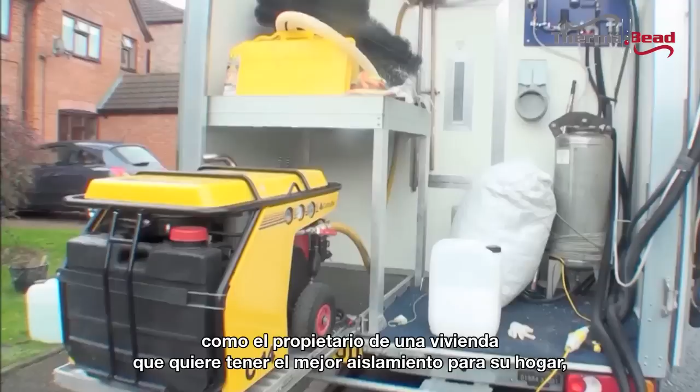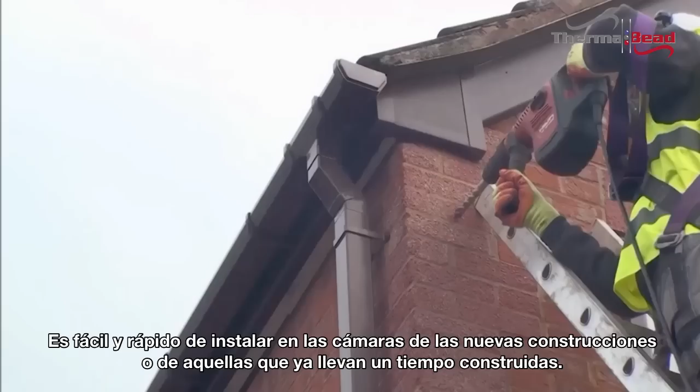Whether you're a building and construction professional or a householder wishing to get the best insulation for your home, there is only one choice for long-term peace of mind. Blown bead insulation using EPS expanded polystyrene is easy and quick to install in cavity walls of new build or existing properties.

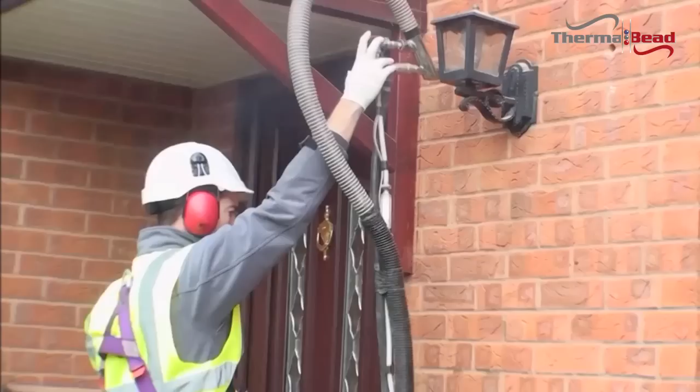It gives superior thermal insulation as well as the reassurance of long-term performance without problems of settlement encountered with other materials. If you choose an NBBA member company, you'll not only benefit from a fast, expert installation, but you will also get the backing of a 25-year CIGA guarantee and BBA-approved certification.

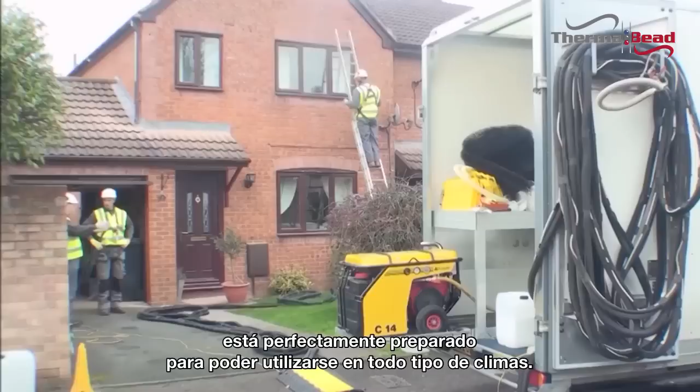There are many advantages from using blown bead, but we'll first look at the ease of installation. The specialist equipment used by NBBA expert installers is completely self-contained and can be used in all weathers for one-day installation. Every part of the property can be accessed and there is no mess left behind.

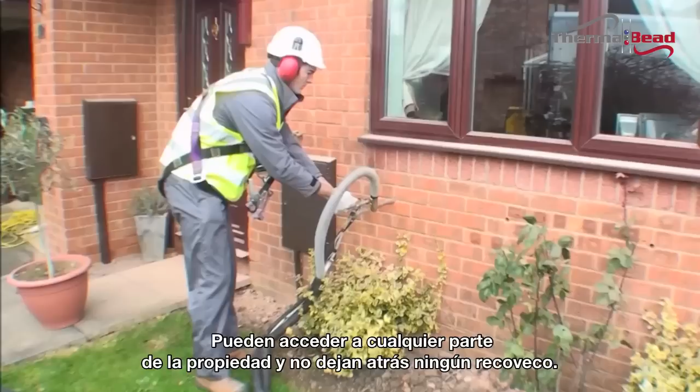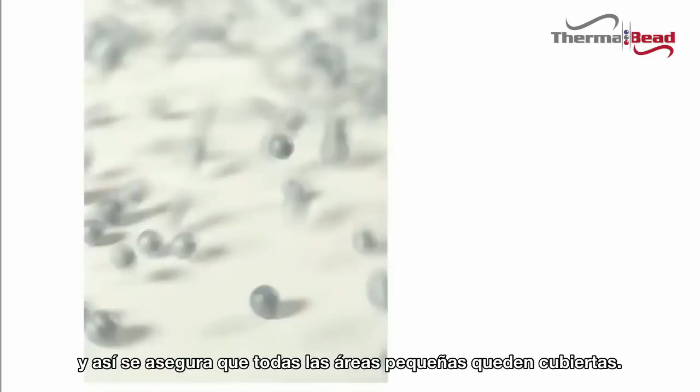Importantly, blown bead insulation actually requires smaller and fewer drill holes in the outside wall of the property. This is because the unique nature of the fast-flowing beads means they fill even the smallest spaces, ensuring all possible areas are filled. After installation, all holes are made good and become virtually invisible to preserve the aesthetics of the property.

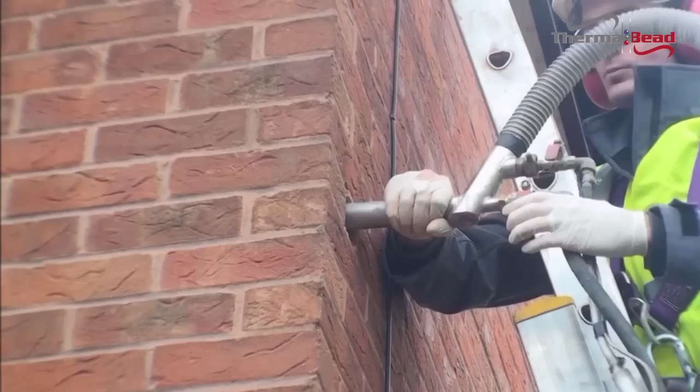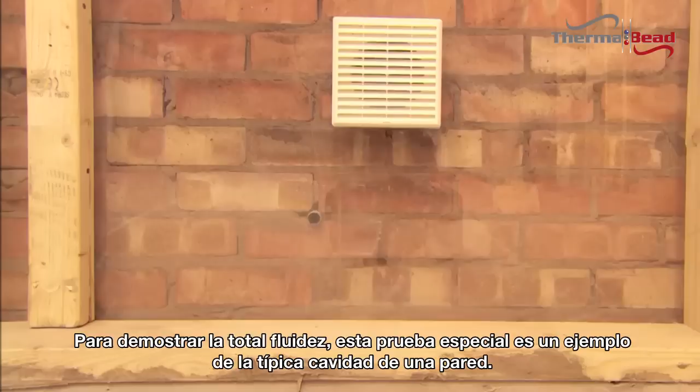With retrofit properties, a long-reach system is available to fill cavities where, for example, conservatories have been built on. To demonstrate flowability, this special test rig is a mock-up of a typical cavity wall. But we've replaced the inner wall of the property with perspex, so you can witness this remarkable flowability as the beads are blown into the cavity.

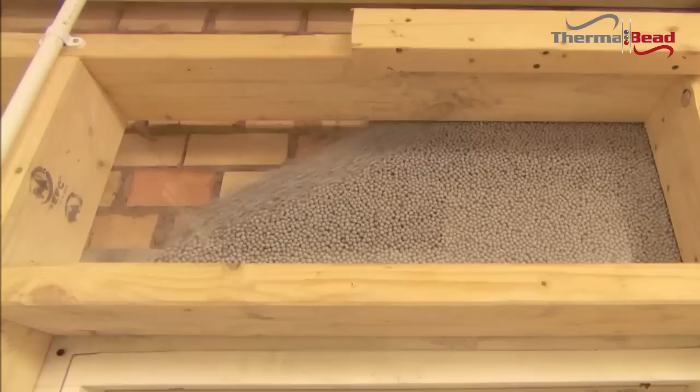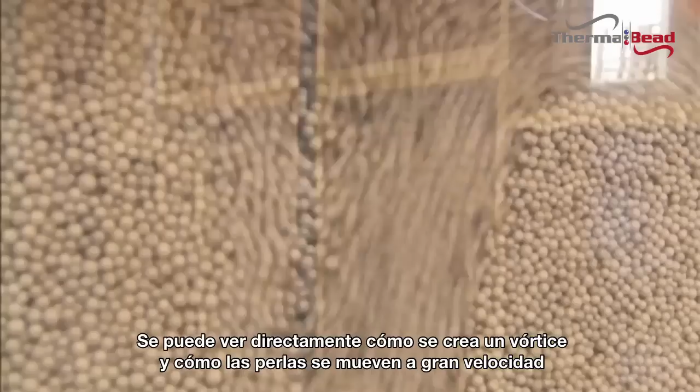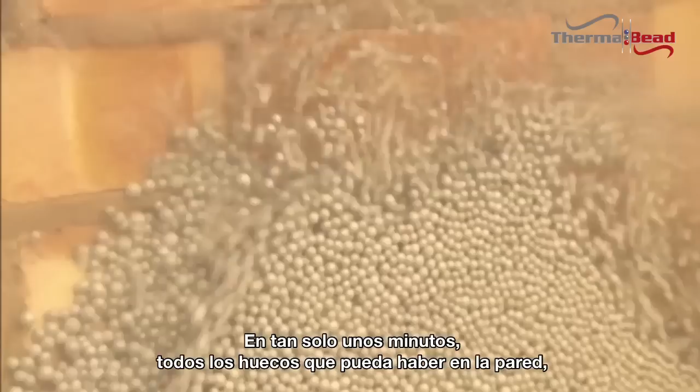Let's look more closely at how blown bead achieves a superior cavity fill. It's because of the special flow properties of EPS beads which no other material can match. You can see straight away that a vortex is created and the beads flow at high speed like liquid into every part of the cavity. They seek out all the gaps and imperfections in the cavity. In minutes, every void around surfaces, joists, conduits, doors, windows and other internal structures is completely filled with thousands of beads to ensure there are no cold spots.

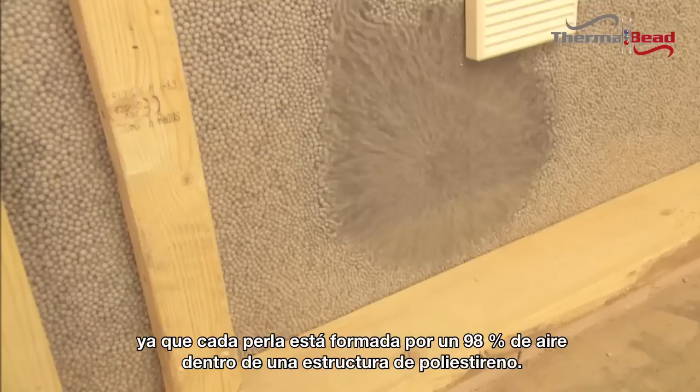Blown beads provide thermal insulation at its most efficient, and because every bead is 98% air captured within the polystyrene, this material gives lambda values which are superior to any other insulation, allowing Part L of building regulations to be easily met or exceeded.

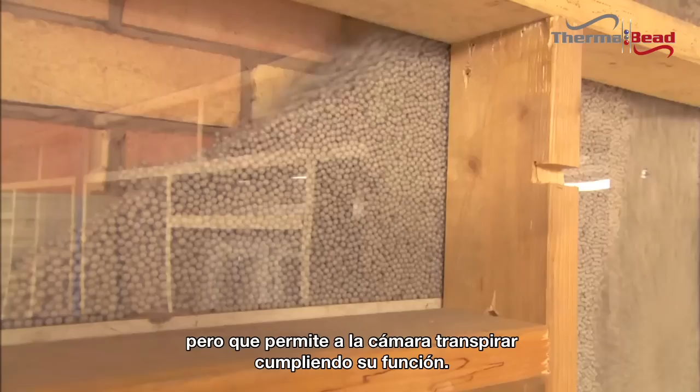After each cavity is filled, the beads settle immediately and become bonded together to form a virtual solid layer of insulation which is stable yet allows the cavity to breathe as intended. Once settled, gravity will no longer affect the integrity of the bead insulation, which means there will be none of the ongoing settlement issues which can occur with other types of cavity insulation.

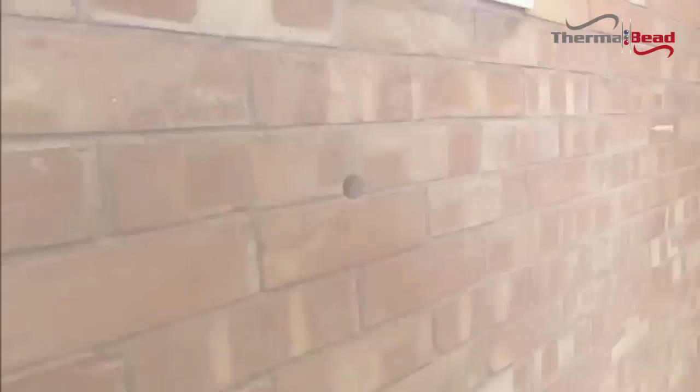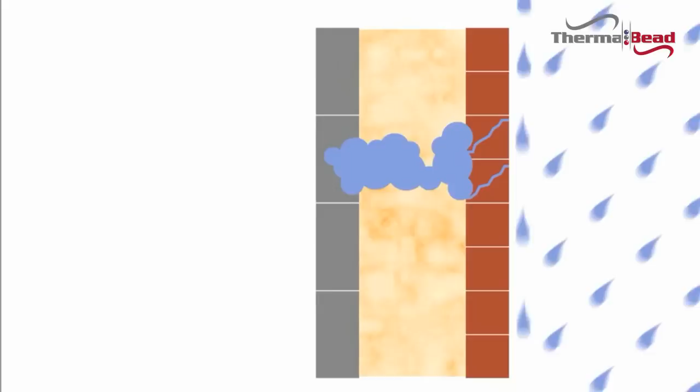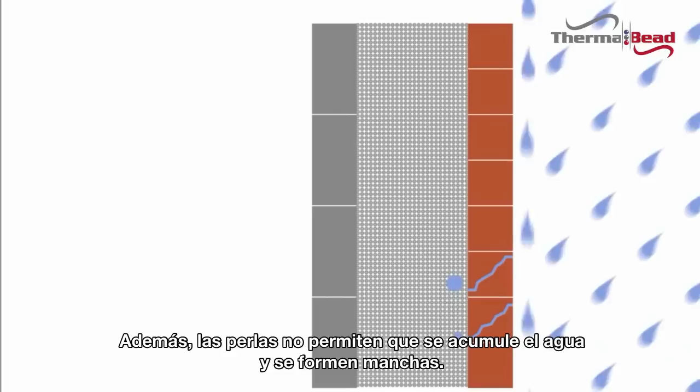Everyone knows the damaging effects which occur when moisture accumulates to form damp patches within walls. EPS beads provide a very effective reassurance against the risks of damp because, unlike fibrous materials which have a natural sponge-like absorption, EPS does not absorb moisture. Additionally, blown beads in a cavity will not allow water to accumulate in patches.

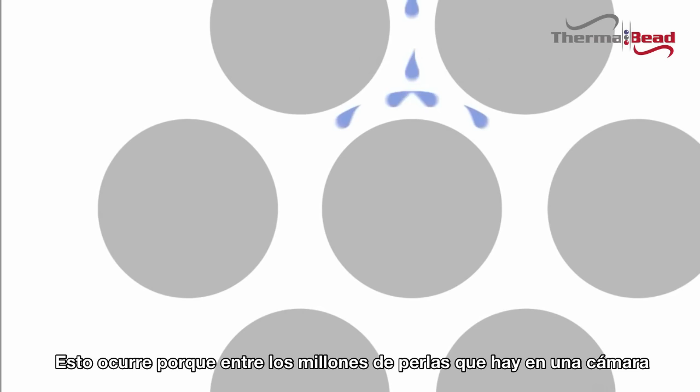In fact, the millions of tiny spheres allow the safe and effective dispersal of any moisture. This occurs because, between each of the millions of beads in a cavity, their spherical shape forms curved channels, and this network of connecting channels allows water to drain freely and rapidly to the ground.

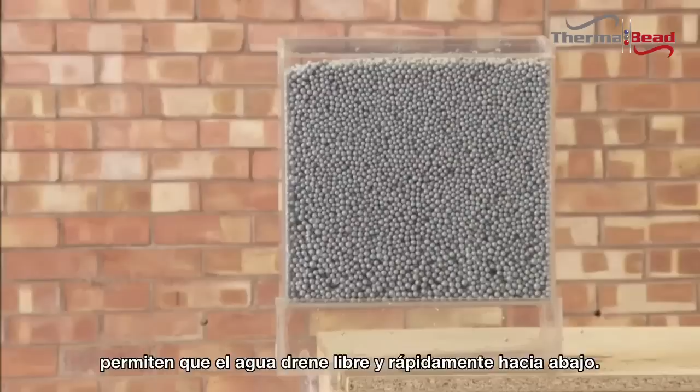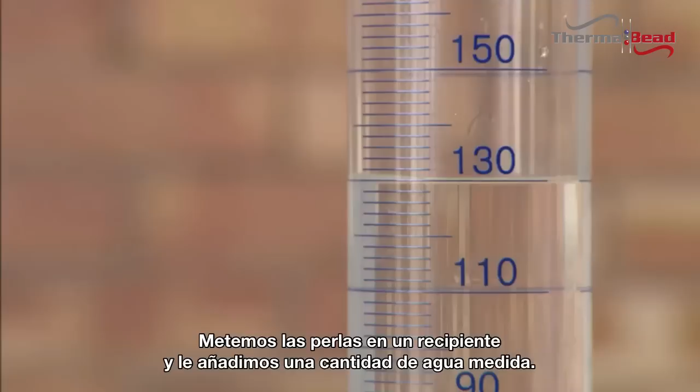To show how it works, this test apparatus demonstrates the highly efficient moisture dissipation qualities of EPS bead insulation. With the beads in place in a mock-up cavity, a measured quantity of water is added, and two things happen. First, gravity immediately pulls the water downwards, and the smooth curved surfaces of the beads allow fast flow to ground level.

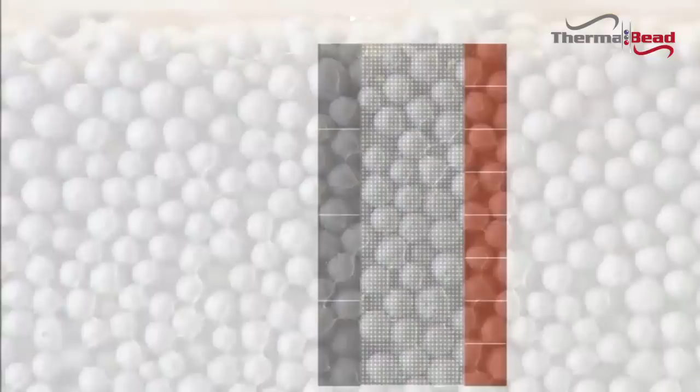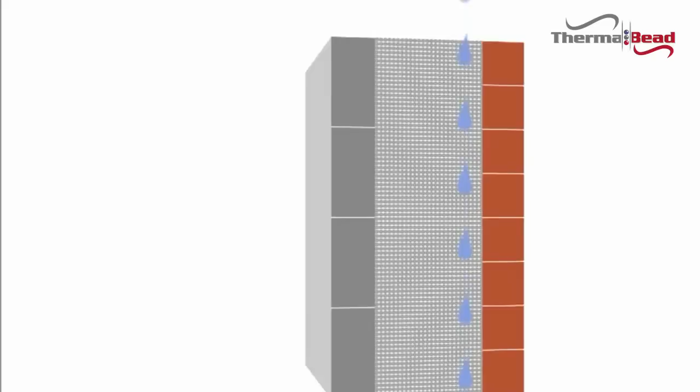Secondly, the speed of downward flow, combined with the lack of absorption of EPS beads, prevents the water crossing the cavity laterally, where it would eventually create damp problems on the inside walls of rooms. With no lateral creep of moisture, there is no risk of internal damp.

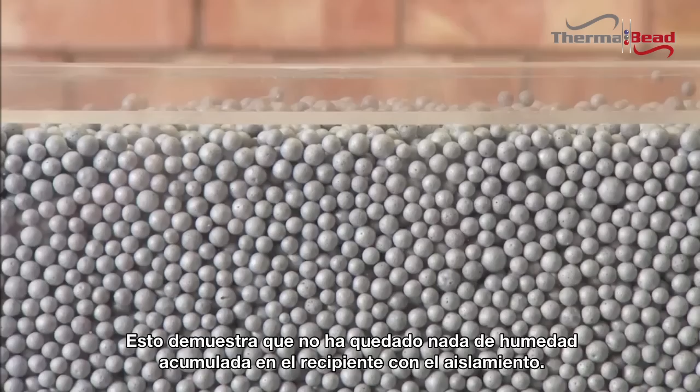To measure how efficient this system is, at the end of the test, the measure of water which has flowed through the blown bead is virtually identical to the test measure first introduced. This proves that effectively no moisture has accumulated in the cavity insulation, a clear demonstration of the effectiveness of EPS bead against potential damp problems.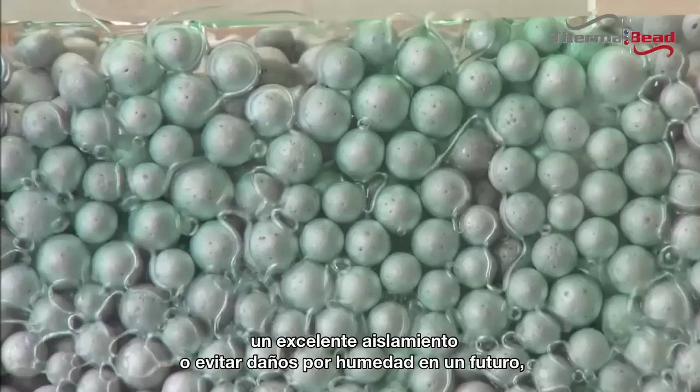Whatever your priority, ease and speed of installation, total coverage, outstanding thermal qualities, or the avoidance of damp problems in future, make blown bead your first choice when it comes to cavity wall insulation. It's easy, quick, safe and superior.